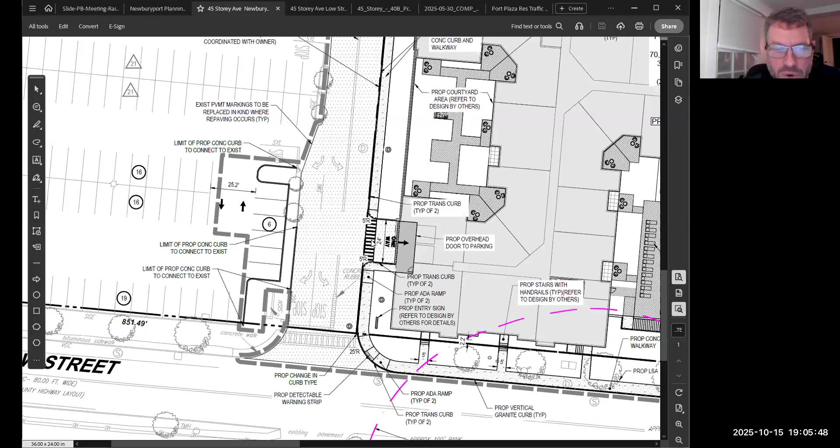There's been discussion about a one-way versus two-way versus some limited spectrum through this entrance, versus the queuing that might result if people are always coming out taking a left. So there's been discussion about how these garage doors work on both sides because of that. Then there's also the drive aisle heading up—not so much a similar capture of things happening here, but the limit of work is drawn up on the drive aisle. And here there's been a bump-out of curbing, some adjustments to the island pieces, an attempt to put some islands and surrounds here.

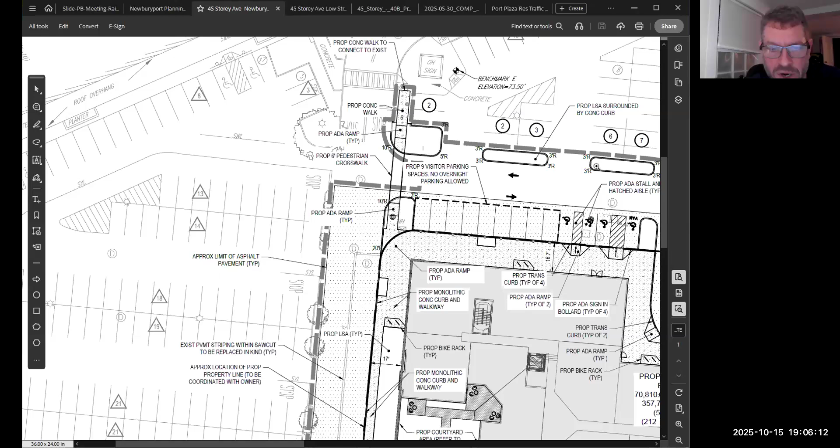This is the only drawing sheet we have from the last set to work with. Primarily what we see in this area on the Shaw side uphill is parking against the building, or perpendicular to the building against this walkway, which I think has been widened in this section. The parking then extends a little bit further down. That's primarily what we see on the site plan itself.

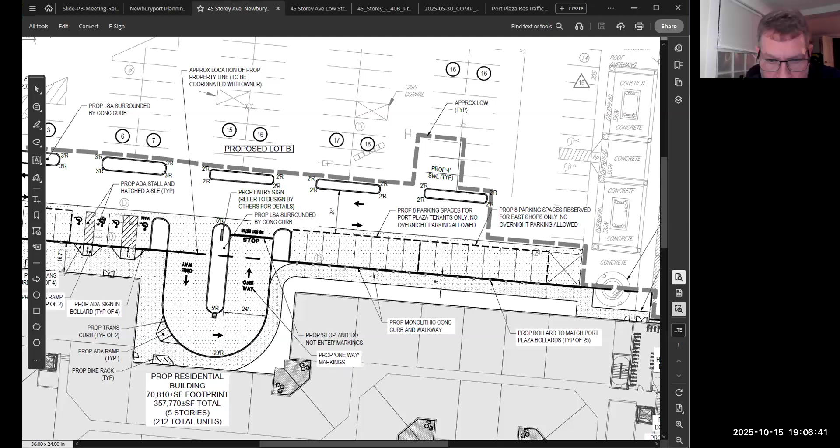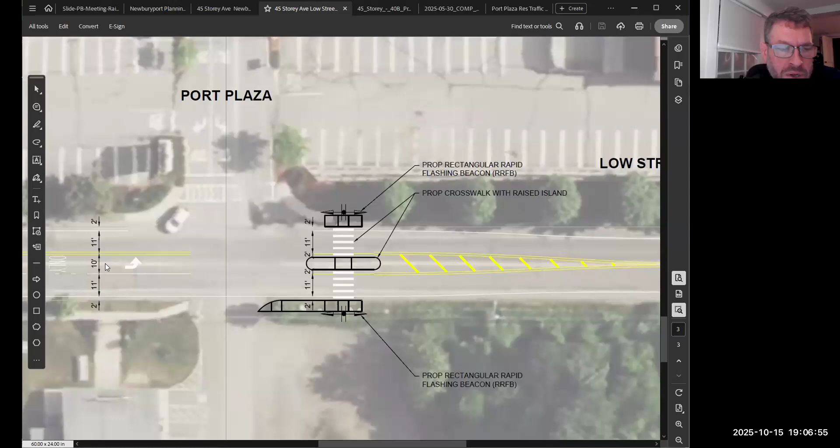Just briefly, on Low Street, in the aerial photograph of that section of the street, the traffic consultant had provided a drawing honing in on this section here. With the drive section, they're talking about the possibility of a left-hand turn, not necessarily a full signal, but rather an RRFB, like the Merson type crossing, which flashes only when there's a pedestrian on it. We're starting to see more usage of those, which is a lower grade option focused on pedestrians in the most limited sense.

And then there's the Hawk style signal, like the one down on Route 1 that was put in by Mass DOT most recently on the bike path connection. Think of that one with a full stop happening, larger mast arms essentially making a full traffic control for that section, as opposed to just flashing when the pedestrian's on it. Neither one of those would address directly what's happening with this or this per se, so these two options are focused on that.

There is in the spectrum the discussion of the pros and cons and reasonableness of having a full traffic signal for the intersection. As you think about pedestrians and traffic, both of those things come into play here and throughout the site. So those are the things that were discussed, and this is most recently what was put forward for this intersection as a possible improvement.

What they essentially said was we would do the RRFB, the Merson style crossing, or if the board feels appropriate or necessary, we will upgrade it essentially to the Hawk style, the full red stops for this piece. There hasn't been a migration of discussion further than these improvements thus far, but there's been discussion about focusing back on that issue on the 28th. So, apologies for the length, but that's in summary what happened and the plan since you last saw them.

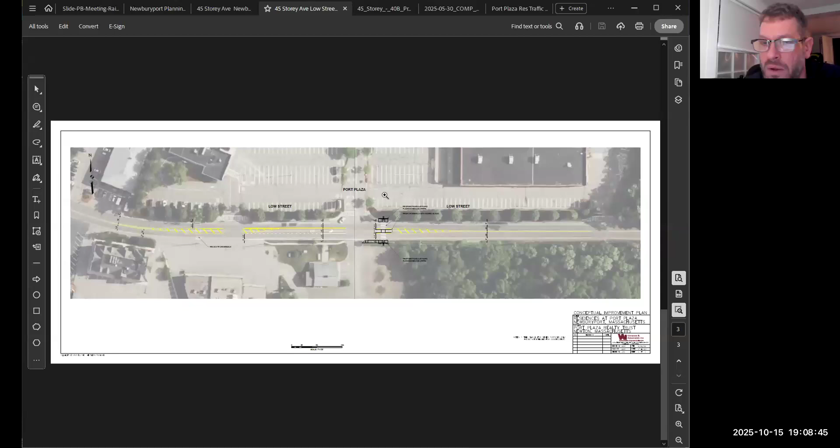I'll let Rick address the intersection, but in terms of some comments we put together, I put together a couple of paragraphs focused on this change on the north side of the building. Our initial comments suggested that both the entry drive aisle off of Low Street and this circulation that runs on the north side of the building should have more definition with actual sidewalks and curbs on both sides. I'm not surprised we're not seeing the sidewalks on the other side of either of these streets, but we haven't foreclosed that possibility in the future.

So I'm not pushing too hard on that, but I did have a reaction to the perpendicular parking that has been located on the north side of the building. If you read the notes on the drawings, there's a portion of that - I think it's 8 spaces at the far right-hand end - those are actually retail parking spaces. The other spaces, they're talking about visitor parking for residential, plus moving the accessible parking spaces over so that they're more adjacent to the building.

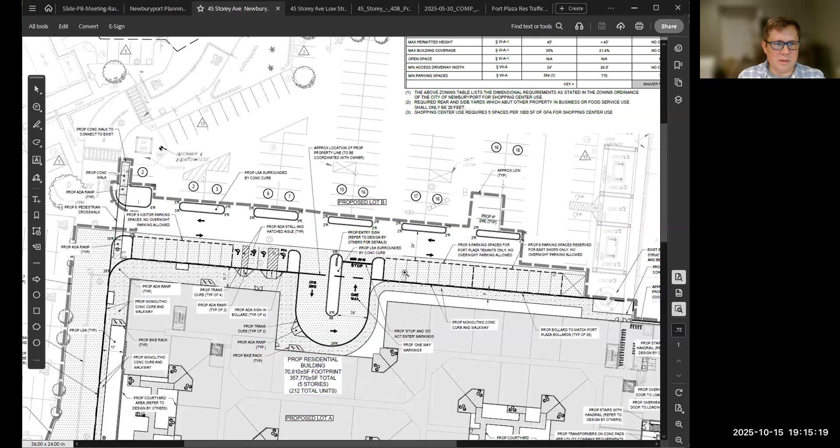We haven't really gotten into this yet, but if we start talking about, in the next few months, this block structure for the broader area, the place to start is the current pattern of circulation that's there. So to me, the Low Street drive aisle entrance is a logical street that could cut all the way through to Storey Avenue.

And this drive aisle to the north of the building, you could imagine that it could extend across the Low Street entrance aisle and become a street that runs into where the West Retail and that parking lot is, and just begin to create some separation and block structure on that side of the entrance.

So it may not end up that way, but it just seems like there's a logic to that right now, which would mean what we're talking about would end up feeling more like a street.

And you could even imagine that in a kind of full build-out configuration, there might be some pad site, one-story retail buildings that are immediately opposite Plaza Landings on the other side of that street, that form a kind of retail edge on that side.

And some of that parking field, if it's possible—I don't know how much of that is committed to Shaw's—but it may be possible to take a portion of that and create some smaller single-story pad site retail buildings that begin to give us the density that we're looking for.

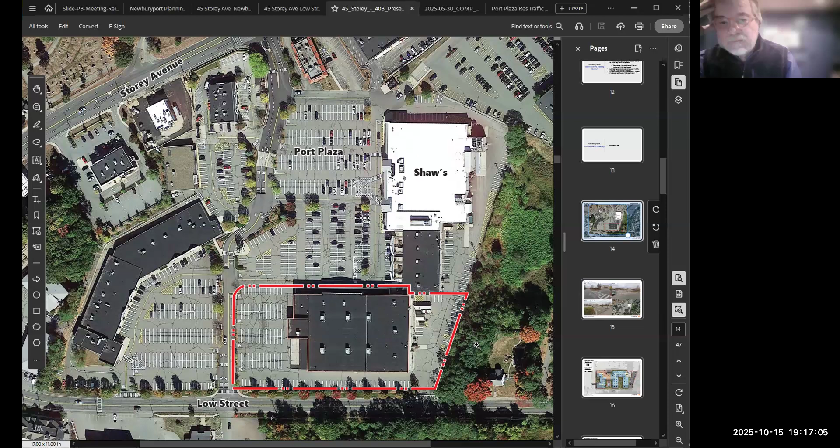Everyone's had a chance to read Bob's draft, right? So we have that in mind already.

Yeah, and I just say, I appreciate the logic. I follow it, and the timing is now. If we don't say anything now and it gets built, then you really don't have a say after that. So I think it's good timing and good logic.

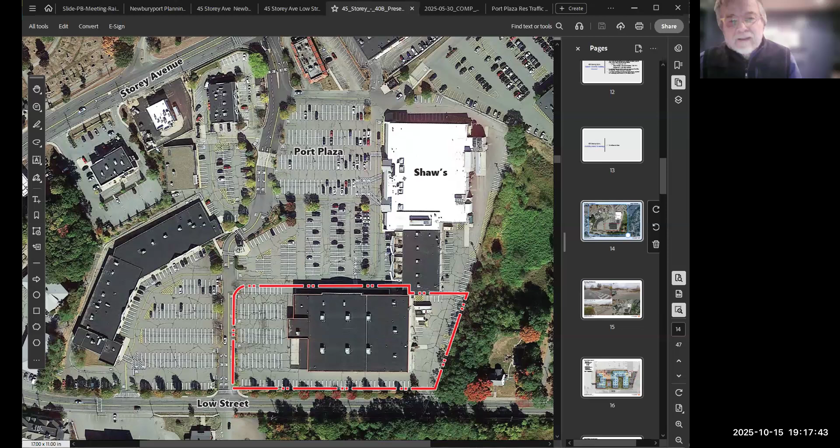I was really surprised at the amount of parking that showed up in this update, and I don't know how they control that really, because with that amount of parking, I don't know that you'd get people parking there related to the retail or not, but there seems like there's an awful lot of parking there with this perpendicular configuration, and it kind of blurs the line between the parking lot and the residential parking.

Right, that's where I was headed with that. Yeah, anyway.

Bob, I think that was actually born out of the need to lessen the amount of run that crosswalk has at the northwest corner. TEC had a big problem initially with the length of that. They said that crosswalk was actually longer than the crossing across Low Street, and that it was just inherently dangerous. So I think the bump out actually is what grew that parking area, was the need to bring that bump out closer and actually narrow that intersection.

Bob is suggesting that there might be another way of doing that that does the same thing at that intersection, but doesn't necessarily put all the parking against the building. It still creates that perpendicular streetscape environment, two-way circulation that's drawn there, and it just moves to the south closer to the residential building by 8 to 10 feet, something like that. The crosswalk dimension remains exactly as they have it drawn, it's just pushed a little bit further to the south, and you're picking up more parking spaces in the larger parking field. So the net loss, I counted it up, is less than 10 parking spaces once you add those back in on the other side over what they have drawn. So it's not a significant change from what they have.

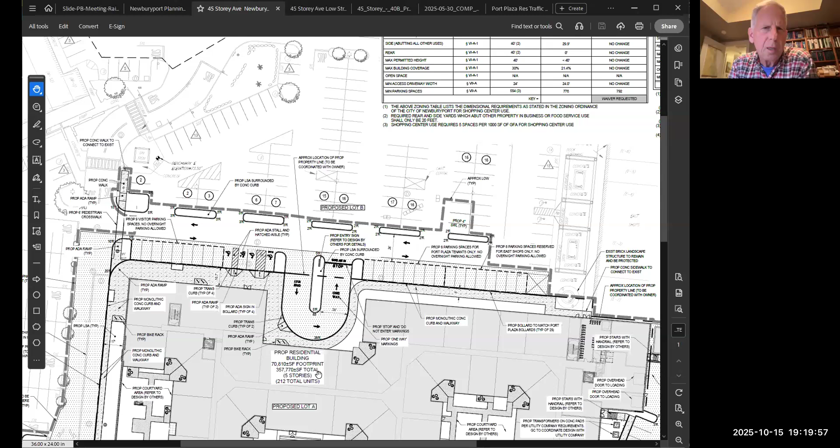Do we know if they're trying to keep that number of parking spaces based on the number of parking spaces that are under the building? Do they need additional ones? I don't have a feel for that.

My recollection is this is equivalent or almost identical to the number that was previously here for the residents side. It might be a factor here, but preserving as many spaces here in this location for the commercial uses elsewhere might be more of a factor here than the residential spaces themselves. My recollection is this isn't really changing that total number of spaces for the residents, but we see along that row some of them are retail spaces. If you want, we can dig further into the parking tables and verify the numbers pre and post from the prior plan. Again, most of the parking is under the building, of course.

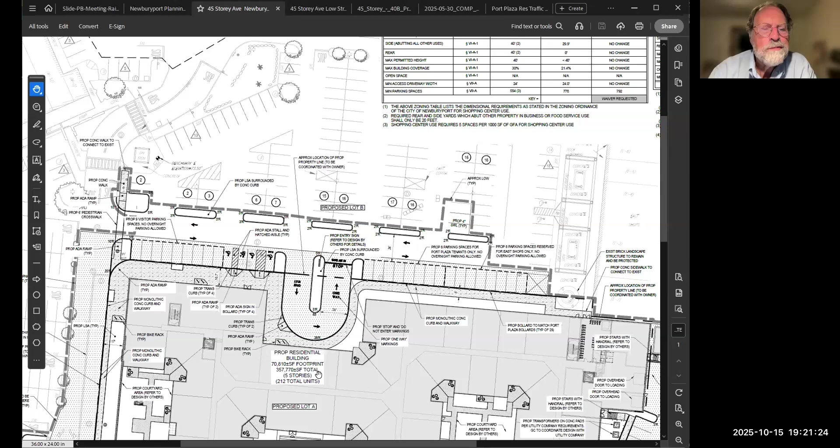I fully support converting the perpendicular spaces to parallel spaces, and you'll have probably fewer than half as many spaces, but they will be all dedicated to the residential use, and then you'll add back the commercial spaces on the north side of the travel aisle. So I think that makes a lot of sense to do it that way, rather than to have some spaces butting up to the building that aren't available to the building. Those spaces are right adjacent to the residential units too, so you don't want that happening - not the greatest juxtaposition of things.

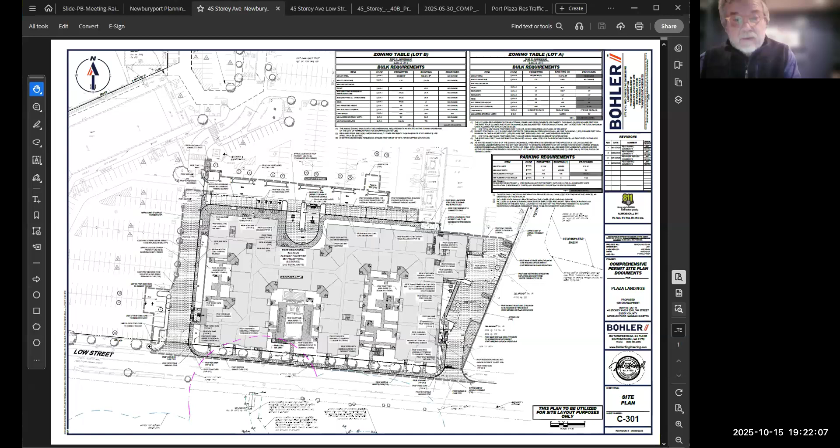Okay, well that's kind of where that went in terms of the draft. There's a paragraph that kind of describes everything we just talked about. I didn't say anything about the changes to the west side of the entrance drive, because that's kind of non-controversial to me, and I didn't say anything about the one-way parking entrance either. I don't know if anyone feels we should address either one of those things or not. We can, if you feel it's important to do that.

My only ongoing concern is the ingress and egress from Low Street to the west side of the building. I was just there the other day, and I was kind of analyzing it as I was trying to come out of that parking area, and there's just a lot of traffic there. I don't know if we have any say in addressing a light cycle, versus the Hawk system or whatever it is that you have. The Hawk system isn't bad down by the Rotary, by the way, and it does make you stop and address the pedestrians, but it still doesn't address turning left into the plaza and coming out. It's just a bear.

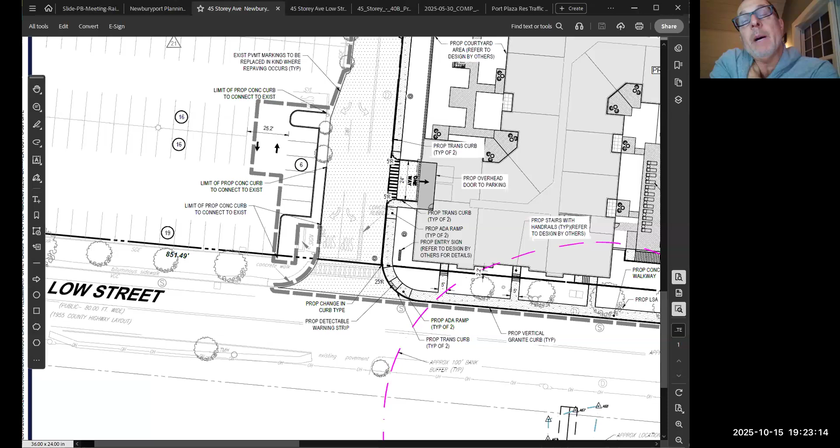I know nothing about traffic studies or things like that, but I can tell you common sense dictates that slowing the traffic down there will help alleviate the burden further up as you get towards Storey Ave.

And it's not like there isn't retail shops, Giuseppe's, CVS, Richdale's, everything tends to domino up into that area. So I have no idea what influence we have over this, but I believe a light cycle would work well there.

I tend to agree with you on that one. Well, I'm glad you brought that up. Oh, sorry Rick, did I take it? Let me just mute myself. Okay, take it from here. It's a perfect segue, right. All right, are we ready to move on? Sure, okay.

Unless anyone has any other comments about what's shown in the Bohler engineering drawing, I think we can move on to this intersection, because that's where the real heat is, I think.

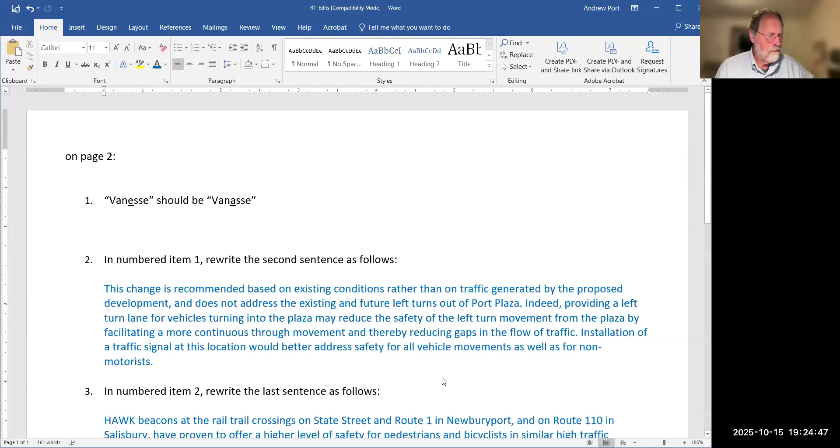Okay, so on the second and third page of the draft letter, I put together some comments about their proposal here. And later this afternoon, I thought about it some more and have some more thinking about that. But let's go back to the picture and go through it. If you go back to the aerial - sorry, did you want the overall? Yep, that's what I want to see, just like that.

Okay, so what happens here - there's a bunch of things that happen here. First of all, they're proposing the left turn lane into the plaza. My concern about that is pretty much just what Charlie said, which is that without a signal and you have a left turn lane, that allows the through traffic to keep going through all the time. So the people trying to come out of Port Plaza turning left have even fewer gaps than they do today, because it's just continuous traffic going through. It's also perhaps harder to see if somebody's coming behind a row of cars that are stopped to turn left. So I think a left turn lane without a signal is definitely a problem.

And I'm not even sure the left turn lane is called for by the development. If it's needed, it's for an existing condition, because as they pointed out, the peak time for left turn lanes, the development is going to add one left turning vehicle every 2.5 minutes or some crazy number like that. So it wasn't really going to be a big increase. So that's one concern I had.

Another concern was the proposal for an RRFB. We've seen, particularly on High Street, that cars frequently just go through the RRFBs - at the driveway to the senior community center at night, and even more so in the daytime, and at Toppans Lane. So it's not a great solution for safety for pedestrians.

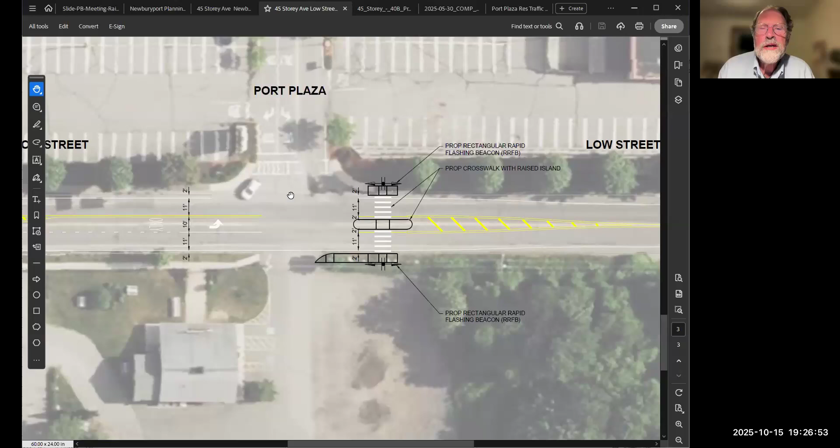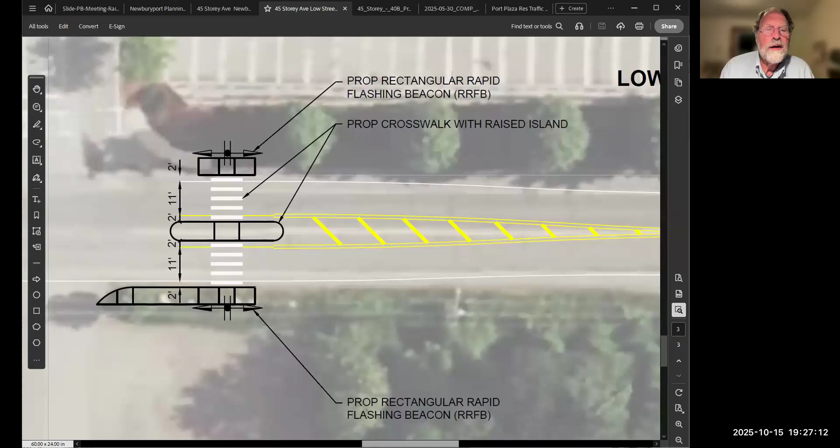And on top of that, what they're doing here - it's hard to see in this plan, but they are taking a 5-foot shoulder on the right-hand side and transitioning it to a 2-foot shoulder, which means any bicyclist who's there has to get into the traffic lane rather than stay in a separate area. That's caused by creating that center island - it basically forces the lanes apart and toward the curb. So my feeling is this isn't great for vehicle traffic, it's not particularly safe for pedestrians, and it's very unsafe for bicyclists.

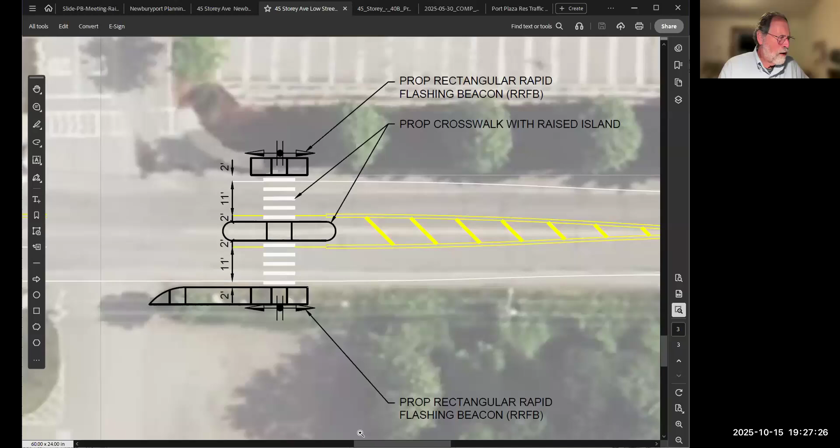So what I had drafted were 3 points. One - if we can go now to what you were just about to show, Andy, the email that I sent earlier today. So number 2 is about the proposal for a left turn lane.

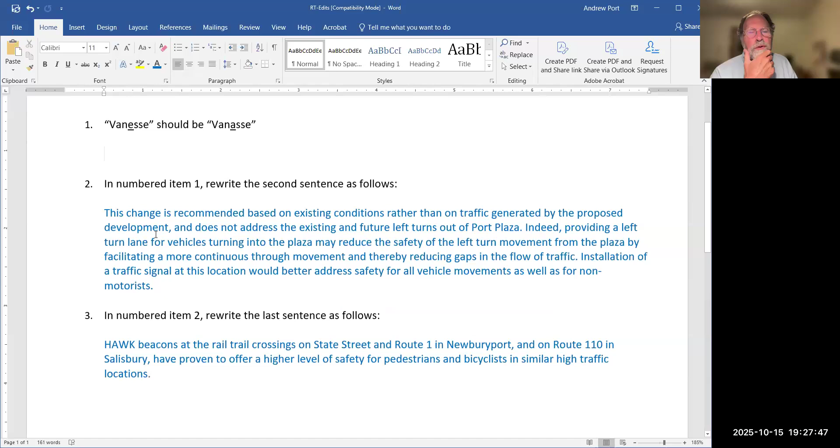What I'm suggesting we say is: this change is recommended based on existing conditions rather than on traffic generated by the proposed development, and does not address existing and future left turns out of Port Plaza. Indeed, providing a left turn lane for vehicles turning into the plaza may reduce the safety of the left turn movement from the plaza by facilitating a more continuous through movement and thereby reducing gaps in the flow of traffic. Installation of a traffic signal at this location would better address safety for all vehicle movements as well as for non-motorists.

So that's one item that has to do with the left turn lane and why I think that's not a good idea. The second thing was about the RRFB proposed with the raised median island. In the draft that went out today, I said experience in Newburyport has shown that RRFBs can be unsafe for pedestrians except in specific contexts and accompanied by physical traffic calming measures.

Vehicles frequently ignore the RRFBs on High Street at Toppans Lane and at the Senior Community Center driveway. These issues can be expected to be worse on a busy commercial corridor with a higher speed limit.

A greater level of pedestrian accommodation than an RRFB is necessary on Low Street, whether that be a pedestrian hybrid beacon, that's a HAWK beacon, or a fully signalized intersection. And then the last sentence would be what's shown here: HAWK beacons at the rail trail crossing on State Street and Route 1 in Newburyport and on Route 110 in Salisbury have proven to offer a higher level of safety for pedestrians and bicyclists in similar high traffic locations.

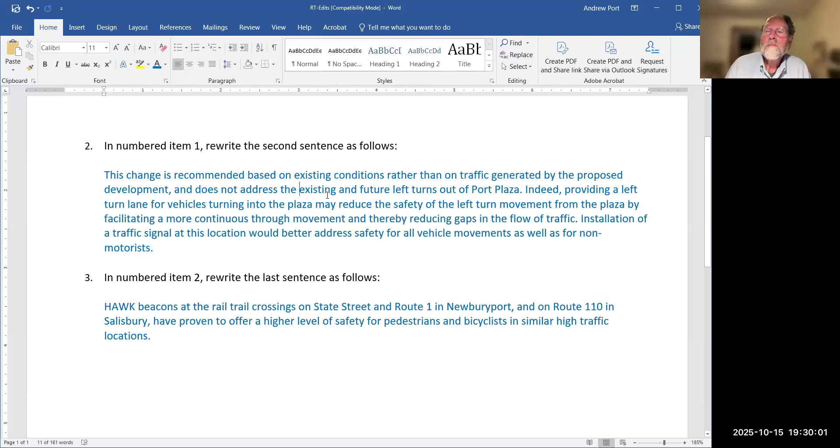I just call it out to make sure everybody's aware. Part of the discussion thus far about the traffic signalization, or the need for something of that level, has been partly in the context that it's not necessarily that it doesn't need it. The traffic analysis, boiling it all down, hasn't necessarily said it doesn't need it. What it said in part is it might need it, but it's largely generated, or the need for it is largely associated with the commercial uses that are already there.

Essentially in existing conditions. And in part, the argument here being that because the project itself, the 40B, which is part of the legal structure of 40B permitting and the analysis of what's reasonable to do as mitigation, this is being framed under a rubric that assumes, well, if the project itself isn't generating it, it's a pre-existing condition, maybe it's not reasonable to call for it here, even though we might all look at the intersection and say that's necessary based on what we see already today, never mind additional traffic or movements. So it's a little bit of an oddity.

I just wanted to call out for folks' attention that there are two legal letters, I think, communications from the applicant here that speak to this, but part of it is embedded in those legal letters of opinion about what is reasonable or not reasonable to do here. Part of that goes to this assumption about what the developer may do or not do here.

So I just wanted to call that piece out here, only because from their perspective, there's partly a presentation that, well, if the project itself, the housing, isn't generating this, it's an existing condition, even if it may warrant it, so to speak, that it may not still be reasonable to expect it as an association with this development or building. I don't necessarily say I agree with that position, but I just want folks to understand how that's being framed.

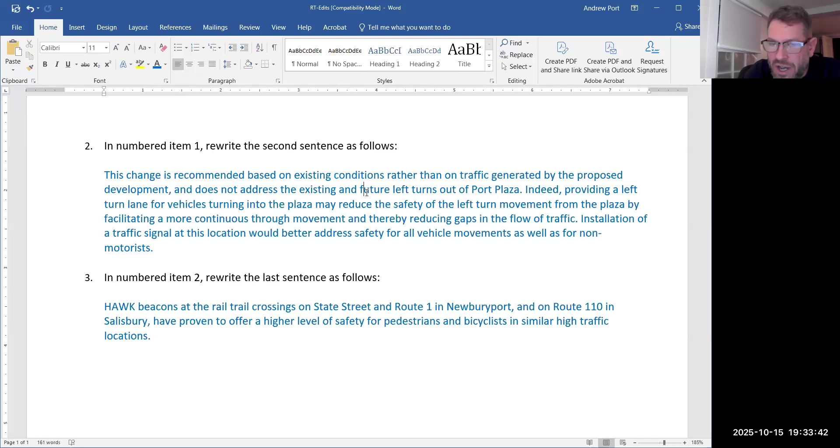It puts a little bit more burden on the municipality to have a discussion about what's reasonable there, rather than normally where the applicant has to present to you why something meets your standards. Here, the applicant presents and says, I want waivers from these things, and explains why they might need them. You'd have the discussion, or the ZBA would. But there's generally a premise that the board is put in a position of having to give rationale why something can't be waived or must be imposed. That's unfortunately the part of the statute that I'm not keen on, because it takes away some of our ability to control proper urban design locally.

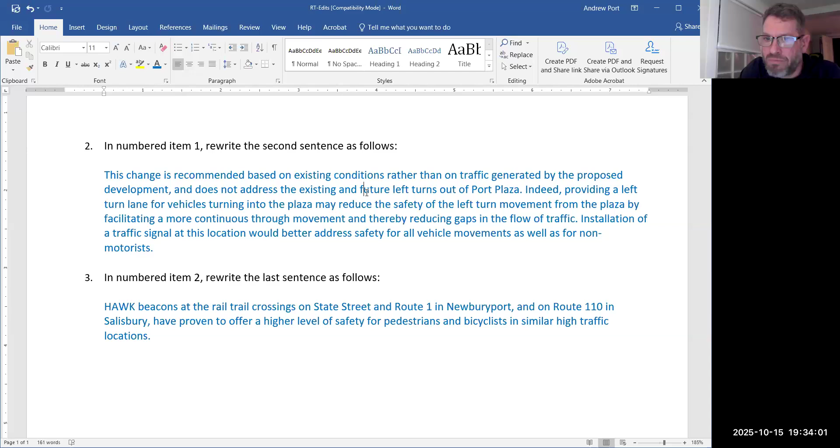I have to agree with you on this, Charlie, that there's an existing condition right now which has a degree of chaos at this intersection, based upon an empty parking lot for Kmart and an empty building there. It's hard for me to imagine that you can add over 200 cars to that system on a daily basis and argue that there's no impact at all.

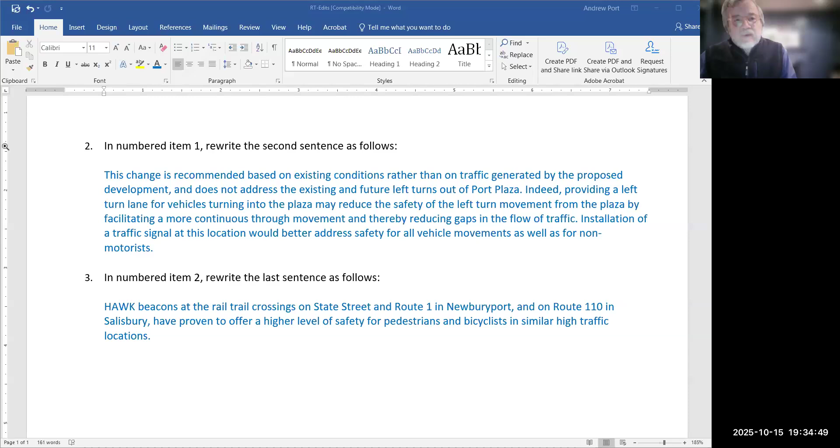And I would say that in addition to those cars, this has come up in previous meetings with the ZBA, there are additional pedestrians and additional bicycles. So there is an increase in activity that will happen around this intersection in a variety of forms. It's hard for me, and I've seen the traffic reports and understand the comments about there being hardly any impact, but it's hard to imagine there's no impact when you're adding 200 cars moving in and out at peak times during the day. I'm not a traffic engineer either, but logic kind of escapes me on that.

We agree there has to be an impact. We've added, and we're going to be adding down the road where Hodges is, potentially additional housing there as well. So why not address this now?

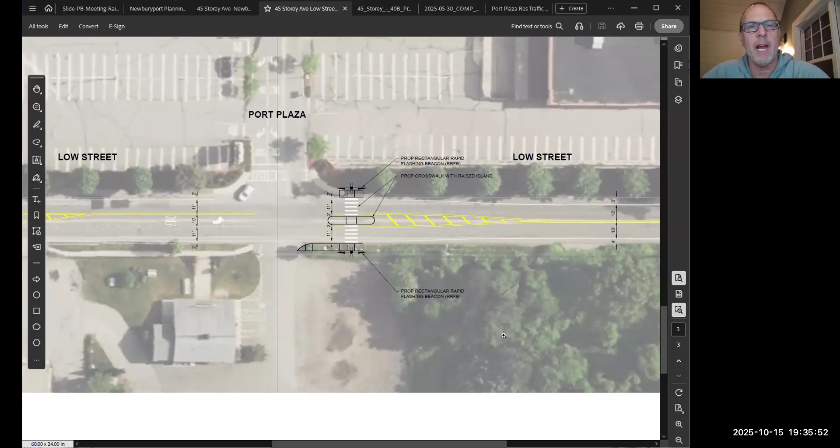I do feel as though Rick's take on this is spot on. You guys know me well enough that I remain quiet a lot, but I'm fairly entrenched on this because we drive the road, you guys all drive the road, you know how it's going to be, and I feel like it needs to be addressed. It's the most critical component of this development.

My thought on that, Charlie, just listening to you and the discussion we had earlier, is we don't have to be shy in our point of view. We're planners, right? We have a right to put our heads together and make a recommendation that we believe is good for the community. Now, to your point, Andy, that may go into another system and another discussion, and the ZBA is in the seat to decide whether they want to make a hard recommendation and have it stand the test of time or not. But I think from our standpoint, I'd almost feel remiss if we didn't make those recommendations, because it's obvious to me, it's obvious to you.

I've come in and out of there, and sometimes you really got to step on it. It's not a trivial intersection. There's people coming down the hill, and if they're going someplace to Route 1, they're not thinking of stopping at any retail, they're just throughway. The other thing is it's at commuting time. If half the people leave the residence and get onto commuter traffic, and there's commuter traffic on Low Street anyways, there's the dilemma. So my vote would be to put it on them and say this is what we think and why, and then let the chips fall where they may.

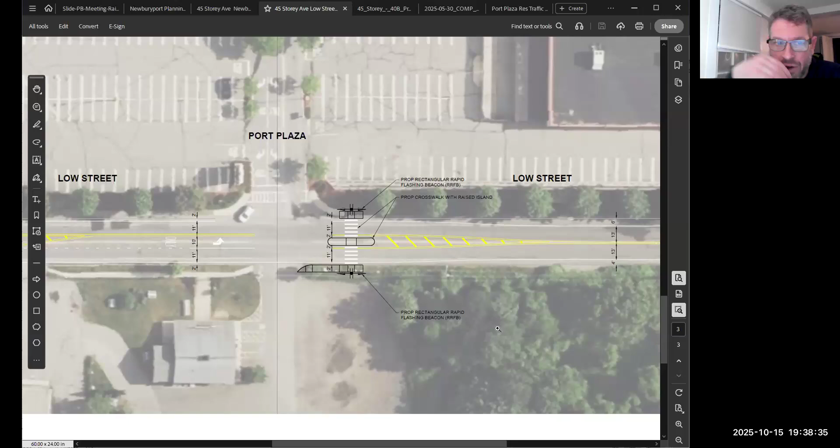So if there's already consensus that the traffic for vehicles is analyzed sufficiently, or isn't a proportional impact of whatever order of magnitude, it's perhaps a different discussion here. To Bob's earlier point, and I think Rick mentioned this in our earlier planning board meeting, it's characteristically different than the existing conditions there. It generates more pedestrian traffic.

I have difficulty here because I keep envisioning a future roundabout, a single lane roundabout, and trying to see whether that would work here. But at the end of the day, I think that pedestrian-bicycle piece might be important to emphasize, only because there's been this assumption that the commercial traffic is what's generating it, maybe not the new housing development itself. And maybe the vehicle pre- and post-analysis has already been done to death. So now what's the thing we're talking about that's different? Here it's the bicycles and pedestrians, perhaps.

Rick made an interesting point earlier about the left turn lanes - if you're going to do a left turn lane, it really suggests that there should be a signal there. I'm sitting here trying to think of an intersection where there's a left turn lane and there isn't a signal, and off the top of my head, I can't think of one. Maybe you all can, but usually if you pull into a left-hand turn lane waiting to turn, there's a signal with a green arrow, or it's a signalized intersection.

I got the perfect example for you, I was going to bring it up tonight. At the bottom of Green Street, right past the police station, there's not a left-hand signal there, so it's War of the Worlds trying to get out of there. That should be fixed as well. I want to fix it, honest to God. Nobody that lives here takes a left out of there. You avoid it, I avoid it.

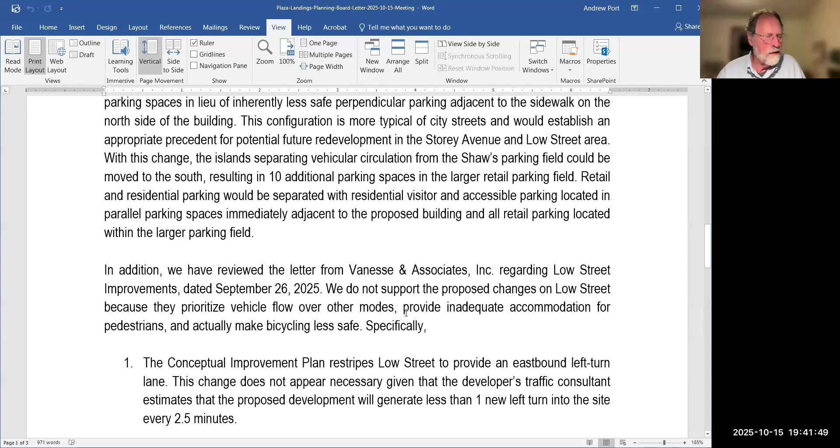In summary, we request that the concept for Low Street at the plaza entrance be modified to preserve existing shoulder widths for bicyclists and upgrade the pedestrian crossing improvements to at least a pedestrian hybrid beacon, if not full signalization at the intersection. If it's deemed necessary to provide the left turn lane, it should be done by expanding the roadway cross-section to the north rather than by taking away existing shoulder width currently used by bicyclists. In the long term, we hope the city will work toward establishing continuous bike lanes along the length of Low Street, but we recognize that is beyond the scope of this project.

So we could make this paragraph stronger - rather than saying go for a hawk signal if not full signalization, we could change it around and say we recommend that the intersection be signalized, and if that's not possible, the backup would be a hawk signal. It's a difference in priority. This is kind of the key paragraph, I guess, after discussing everything.

I'd be open to that. That makes sense. Has there been any comment from any of the traffic consultants about a negative impact of a traffic signal here?

Yeah, there's been some comments about this, and I'm glad you asked. At the next meeting, we're expecting the traffic consultants might do a slide and presentation, a table summarizing briefly the pros and cons, considerations for signalization versus RRFB versus Hawk.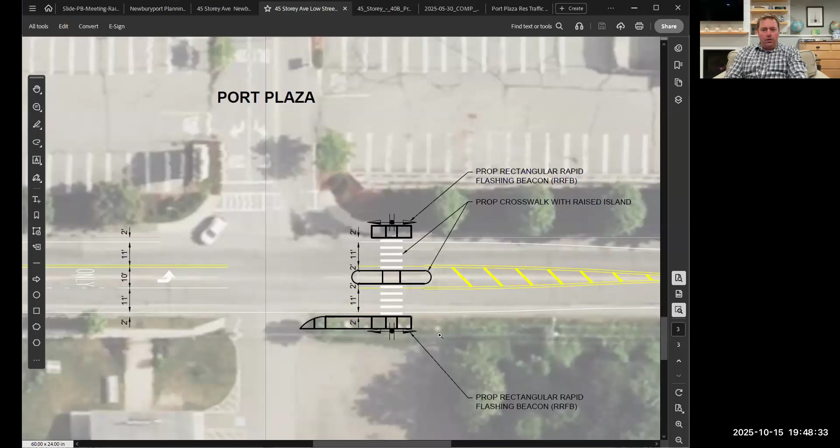Question for Andy - you mentioned a roundabout, and I had discussed it a few meetings back. Has that come up at all in the conversations? Because I haven't heard of any conversation, to be fair that may be unique to me. I don't know, but I think there's something to be said for simplicity and learning from things that happened in Europe long before America had suburban sprawl.

I hesitate with the idea of equipment, signalization and whatnot when there's something that could be natural with flow for both pedestrians and vehicles, but at the same time relatively safe. So for that reason, I keep looking at this and wondering whether a roundabout in this area - I can imagine that with something here, whatever happens long term with this block setup and future building frontages along the streetscape.

Arriving in an urban area, I imagine this sort of brick roundabout circle thing here with one lane going around. I realize there are other factors and that may be the wrong thing here, but it hasn't come up - it just keeps coming up in my mind as a potential option that could be beneficial long-term here.

Should we include it as an option in our report? That's up to all of you - it would be a new thing thrown in the mix. I don't care myself because I care more about the long-term results, but that's something for you guys to decide.

It's probably the right thing - what's the approximate cost, Andy, for something like that? I mean, I like the idea, but I would imagine that's way more than $1 million.

I don't know the cost differential there. I think part of the problem with signalization is all the equipment and that kind of stuff. But yeah, a roundabout does involve curb lines and adjustments in more places, so there's a cost to that. Whether it's the developer now or the city long term, all I'm saying is I wonder whether that might be a desirable setup here.

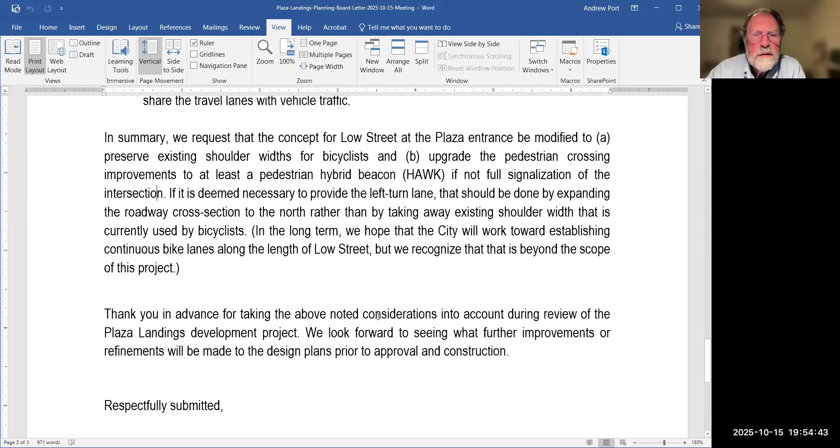Was there anything else that anybody wanted to call out? And Rick, I don't know if you were done with the other notations. Nope, that's all.

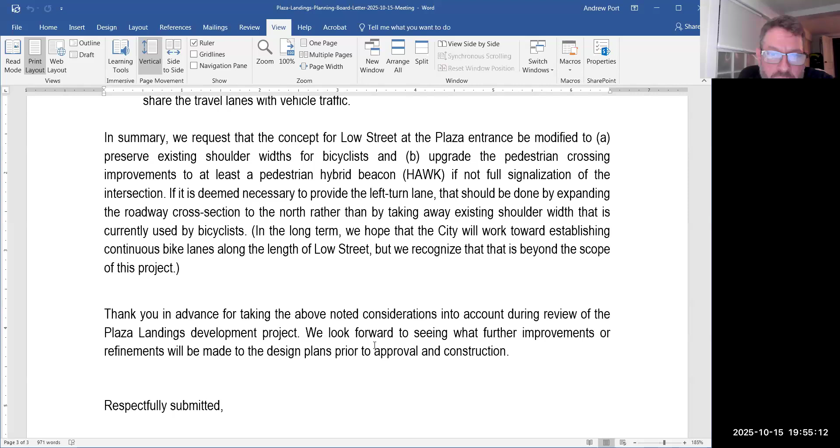So if we can make these couple of edits, I think Andy and I can come over tomorrow. We'll touch base tomorrow morning if that's all right. Do we need to have a vote on this? I guess I'd suggest, as a best practice, normal typical protocol is just a motion to authorize the chair to submit the letter as amended to the ZBA. So could I have a motion? So moved. Second.

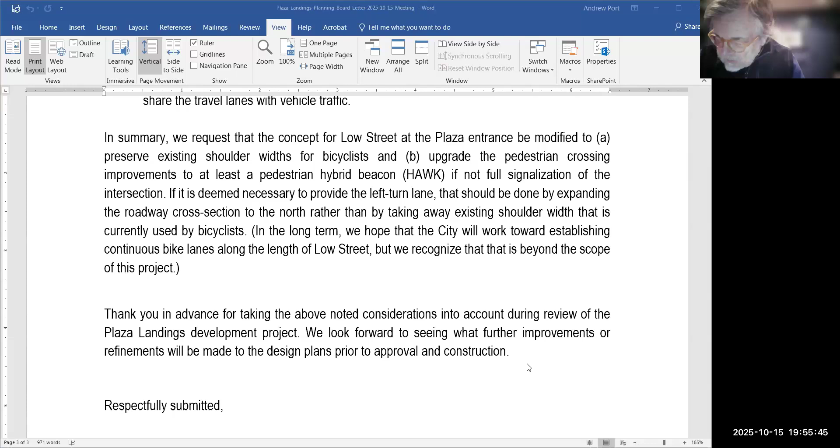We're all on screen, so I guess I need to do a roll call. Brian Belcom, yes. Alden Clark, yes. Charlie Palmisano, yes. Jamie Pennington, yes. Rick Tainter, yes. And I am a yes. Jack and Matt, I know you're supportive of this, but we don't need your votes on this one.

Okay, so with that, we will put this in final form, and I'll try to get over to sign it tomorrow, Andy. Sounds good. Yeah, I'll touch base with you. If you need me to be around for any reason, you might want to just touch base with me, because I might be bouncing into a meeting at one point.

So I do have one question, and Charlie, I think you made mention of this. What's going on across the street? I thought we had some information that Andy — who's the guy that owns the property again? Minco, the same Minco company that did the 40B projects, the one on 1 and 3 Boston Way that's been permitted thus far, has land here and has expressed interest in doing something similar here.

Not of that size, obviously, but something more akin to what's happened at Boston Way. So you may see something like that coming along, and that's where there's been discussion of perhaps — we have ice cream there today, but more pedestrians going back and forth here. Interesting. The Hyman's building is probably going to become something different too. They're closing.

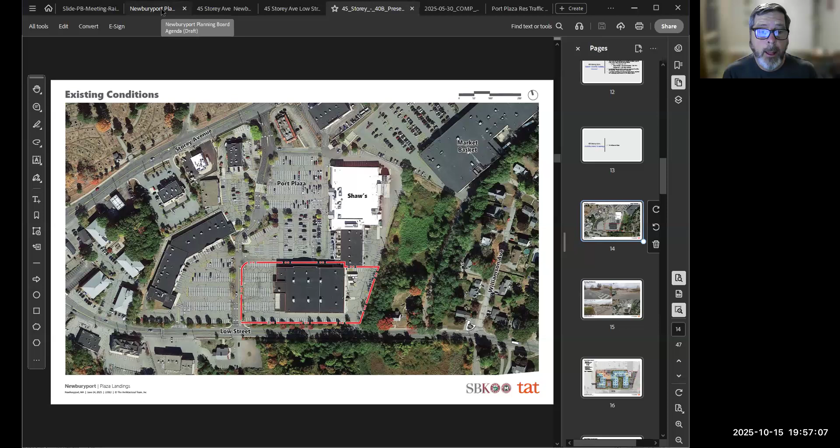Eventually that whole strip retail will be redeveloped. If you think about our long-term planning study, you don't want strip retail with a big parking field in front of it. That's not the urban diagram we're hoping for, so strip retail isn't in a good place. You almost want to rebuild closer to the center drive aisle, have some convenience parking, and put the parking field behind it, flipping the whole diagram. Long term, that collection of strip retail isn't well positioned to fit into a future plan. Agreed.

On the minutes, Rick had a comment. I haven't had time to look at the October 1st minutes yet, so I'll suggest we table this and circle back next meeting to get as much out of the way as we can.